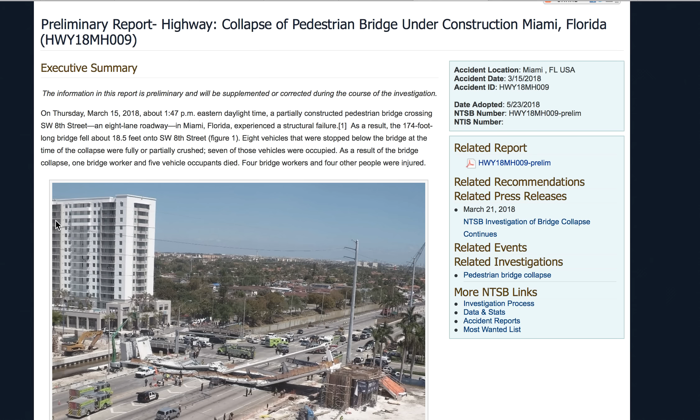The NTSB released a preliminary report on the pedestrian bridge collapse under construction in Miami, Florida. Here's the executive summary: the information in this report is preliminary and will be supplemented or corrected during the course of the investigation.

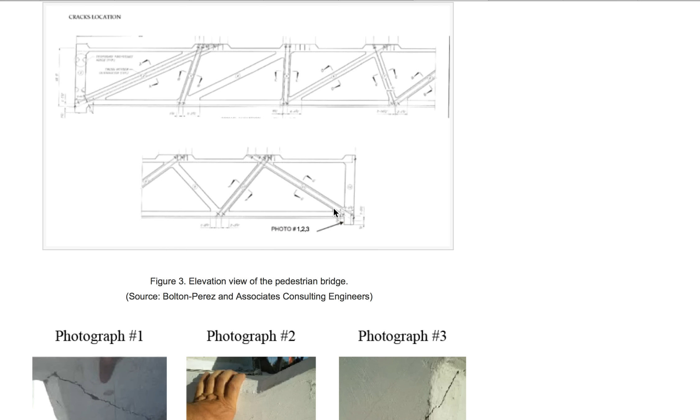Let's jump to where they bring up photos 1, 2, and 3, pointing here. Let's already discredit this silly report. How much effort does it take to point this arrow correctly? It would take the effort to know how to correlate the images to a sketch. So whoever put this report together, and whoever did the photos, obviously doesn't have the skill set to match this up.

So we're back to these airplane people making bridge diagrams that are just wrong. This shows again that the NTSB report is not going to be worth the paper it's printed on.

It's terrible. This crack - I have a few videos talking about crack analysis. I'd hate to say it, but it appears the NTSB is really leaning towards this crack as the failure point. To me, this shows the crack indicates movement, not necessarily the failure itself.

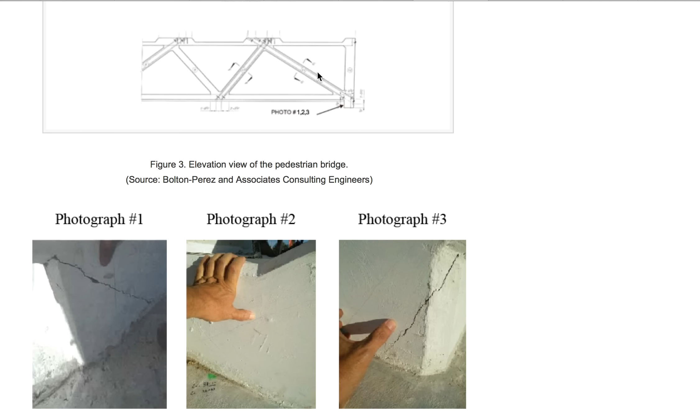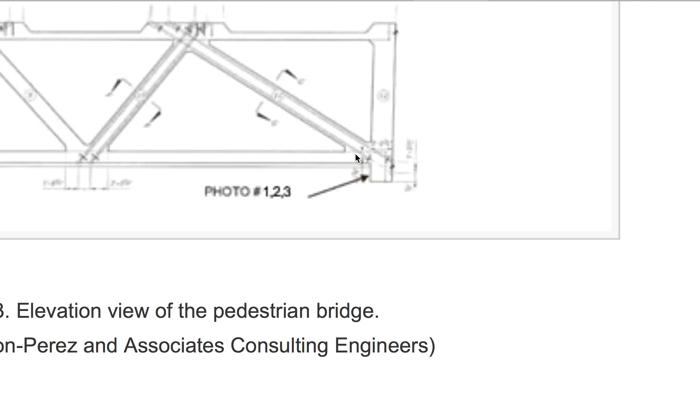If I put this under compression - number 11, the deck, the load path, even the bottom as I've pointed out - to say it cracked because of compression on the bottom half of this, not the top, implies that the load was able to find a weak point here as it compressed. But it can't compress that much. This gap is much larger than the expansive ability of that column in compression.

So looking at this crack, we do see that apparently at the bottom or the top there's some shearing going on. We can say something like - see the shadow mark - that one part passed the other.

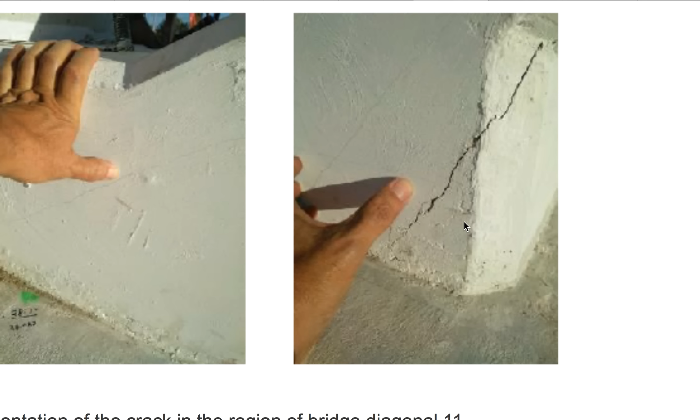Which I find interesting - I believe this was all cast at one time. That's assuming it wasn't, because we have this pour over this that we can't see. They're going to have to grind this surface off to determine that. It'd be nice to determine it.

We see this finishing going on here for you guys - some odd finishing - and over here in the left image also. So I'm doing this crack analysis, but I have to hurry up because I've got to hit the job site.

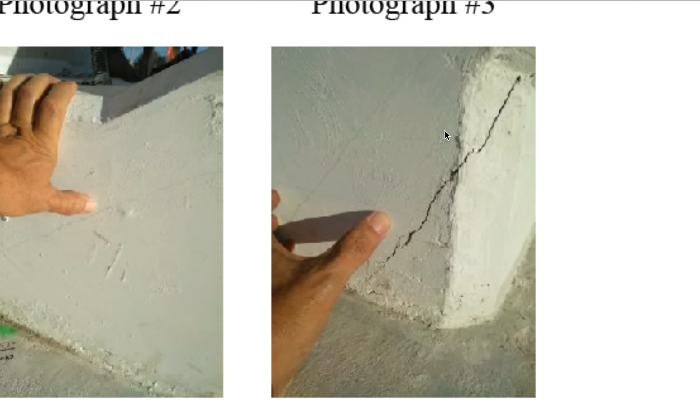So we've got these longitudinal cracks along the member, which could be indicators of the reinforcement inside under compression, buckling, as I showed in my other video on my other channel, mirroring itself through. It could be the dead weight causing it, the buckling of the reinforcement showing its way through.

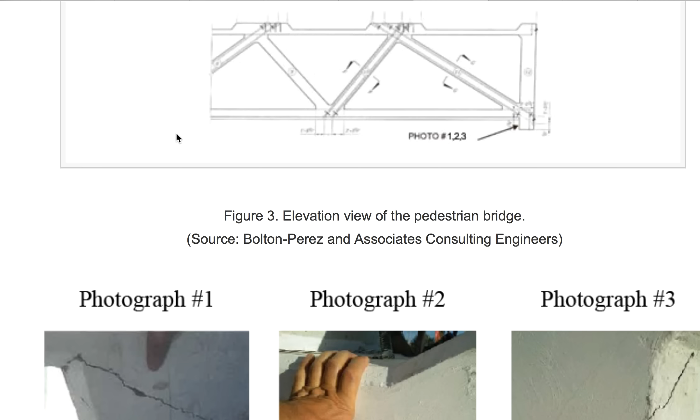Let's go to the other side. This would be, I believe, number 11 and the bottom of it, and that would be the underside, going in this direction. As you compress this, the compressive forces are in that direction.

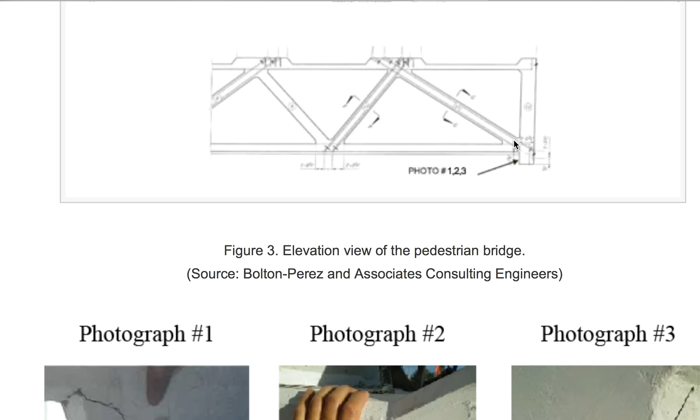If Denny Pate and them were trying to - not detension, but tension this column to address cracking, which I said in one of my other videos I believe they were addressing at the time of failure - then his audio where he says he's going to address them later, or implies he'll address them later with the FDOT, appears to be fabricated, not a full truth. It's not forthcoming, because I think they were addressing the cracks at that point, possibly including this crack.

Now, jumping onto the bridge inspection while they were moving it, we know now that these cracks appeared when they had it on the uprights on the side of the road. So then we have the engineer that was supposed to monitor the bridge during movement. If you can find his tweet or their page, they clearly say that it was uneventful. So that engineer is also being devious, because they're not saying that the existing cracks did not open up anymore, or maybe they did open up more when they put it in place.

Remember in my previous video that they were supposed to have supports in here during transportation. I think that the engineer of record and Denny Pate probably said, let's go ahead and post-tension these more during transportation to counteract that, since the supports aren't in there.

Now I also think that wasn't showing in the 2016 plans, which I can't find the full plans anymore in all my files. I don't think it was showing there. And so it was clearly intent in 2017.

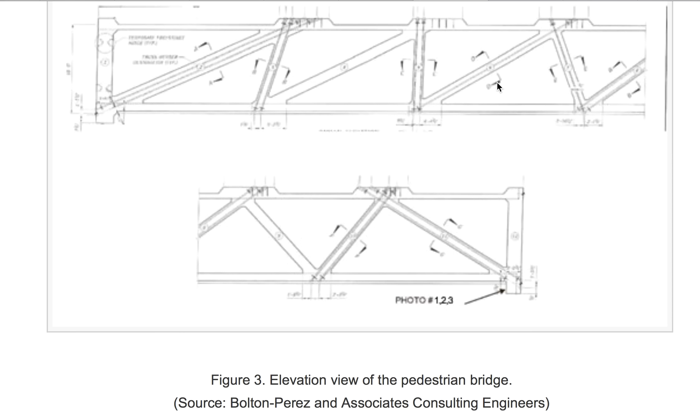So who released that? Who was holding back that information when we were clearly only allowed to find the FIU plans online of the 2016 with the stamp on it, and the rest of the plans not being fully stamped? This is, so you're not lying to the public, but you're deceiving them. You're purposely sending them down the wrong frenzied angle, because we all did analysis on the 2016 until the 2017 showed up.

And I think that was done with some nefarious reasons. So possibly—this is my opinion, when I say I think, this is all my opinion. I'm not slandering anybody. These are all my opinions.

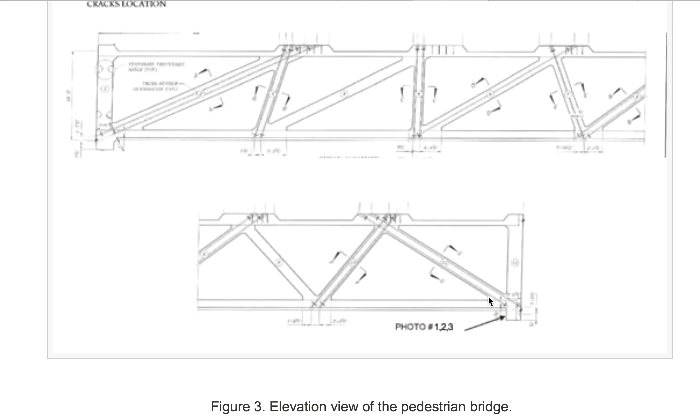I think the location of these members, as you know, is wrong. We have different locations of the post-tensioned members. One's high and one's low. Again, creasing this one first and working onto this one last—and I'm sorry for talking fast because I gotta go—once you did this, you created a load underneath the underside of this, a stress that could easily cause a buckling or cracking, even possibly cracking down the bottom of number 11 once you started it.

So I'm going to show you how we could get this crack. You created a force here, tension, post-tension in the top part. Here's roughly in line where the post-tensioning is. And then when you did that, they could have opened up the bottom, flexing this, creating a torque. Oddly, it would be the worst place you could imagine a torque would be. I would think it would be here. Deflection would have been more in the middle of this span of the post-tension rod.

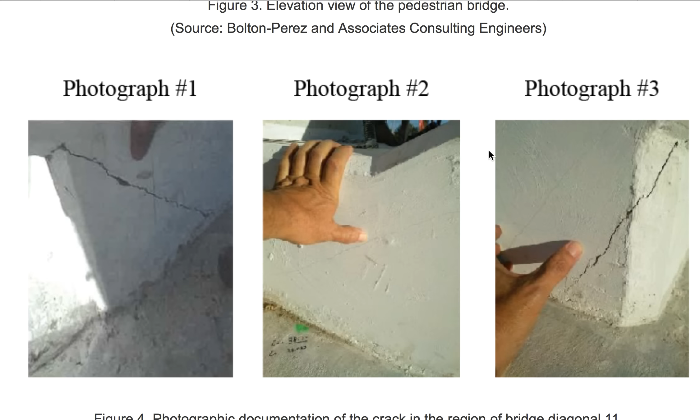I can't see it here. So maybe this is just a conflict of rebar inside here that once it was post-tensioned, or once it was cured, or it could be a very shallow piece of concrete across underneath the underside of this, half an inch from the surface. Something non-nefarious, if you will, as that. Something, nothing to cry about.

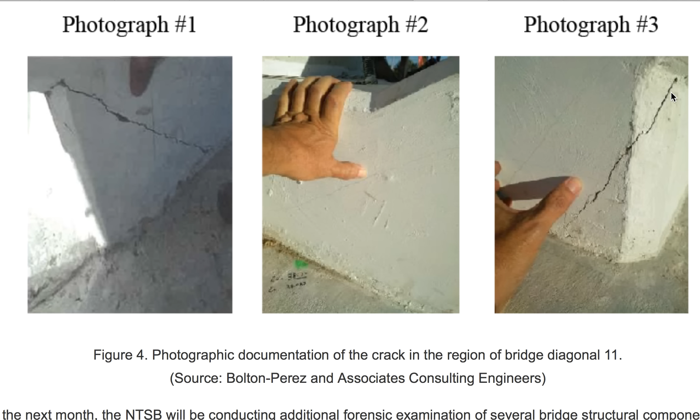Now, if you remove that, what happens when you remove it? And I'll get to the report, bear with me, sorry, my screen jumped. If you remove this section altogether—hand size is like 7 inches, I'm sorry, it's 8.5—it's right about there. It's right at the crack there, but it's in line with our post-tensioning.

Ideally, and now we got hindsight, but ideally, they should say, 'Oops, this might be something structural. I need a structural engineer, guys, to take a look at this. Until then, let's just close the bridge off.' So they would close the bridge off and address these cracks.

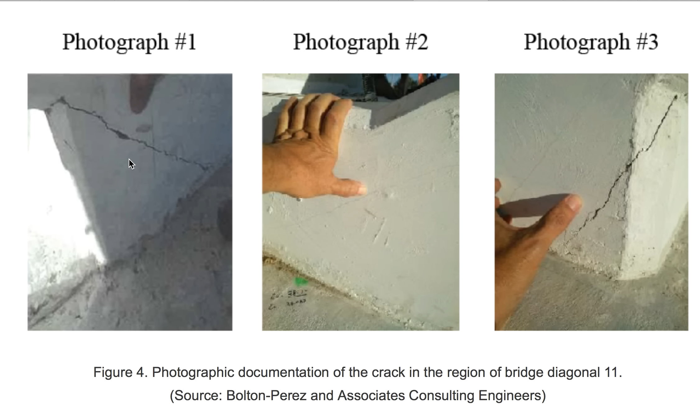But they knew about these cracks beforehand, as we saw in the letters where the BPA said, 'Let's address these cracks.' But in the same token, he says, 'I think it's just reinforcement that's causing the conflict.' I think that's what his general words were, and we should just monitor it. Well, that's unfair. You should actually resolve why it's there. Why do these cracks appear here? Do we have the middle deck flexing down?

If the middle decks were to flex down, the top and bottom flex, you could create a movement here, but you would also want to see the same down here. But nevertheless, they're different angles, so I just can't say that arbitrarily. Also note that there are different cracks inside here and here, here and here.

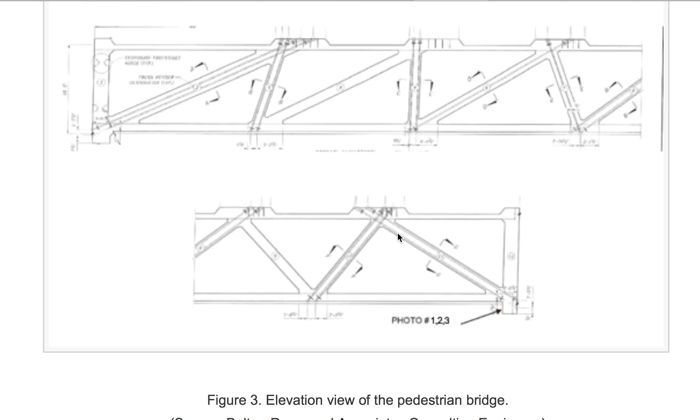This would be a crack. The cracks, I would think, appeared after they moved the structure and detensioned it, like the guy said at MCM, and maybe more cracks appeared at that point. Then maybe they had a meeting, right? All the engineers and non-engineers that were there said, let's go ahead and try something here. Let's try some post-tensioning, let's add back forces, in other words. I know we detensioned, now let's go back and add it again. Because we just don't have it in the plans that they should be detensioning or tensioning this in the steps.

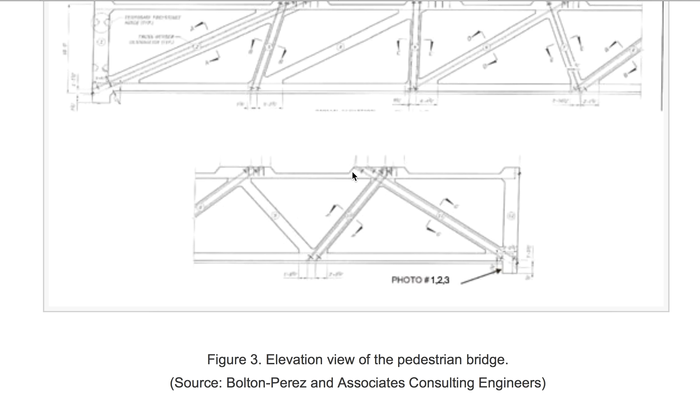Or maybe they had the cracks, they were trying to address it when it was still in the yard, on the side of the property, that all these cracks are present, specifically these cracks going across here. They would really close up, if you will, if you were to post-tension these rods.

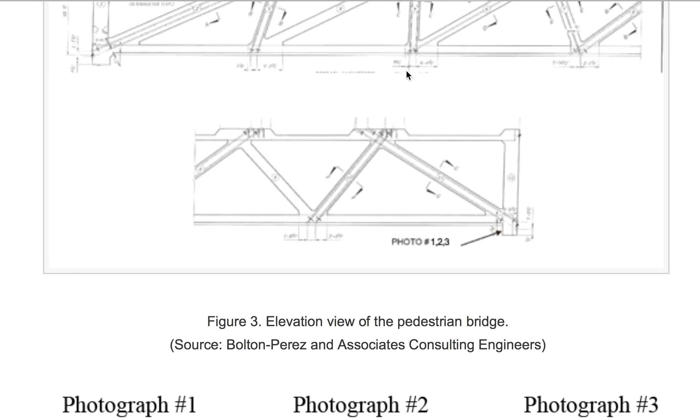If you look at the bridge images I showed in other videos, underside, you see this white coating they put on the underside of the canopy, which is in odd places. You can't accidentally get coating up there to that degree on the underside of the canopy, which is this distance from here to here, I forget what it is. Canopy's 8 foot wide, I forget this height, 16 feet.

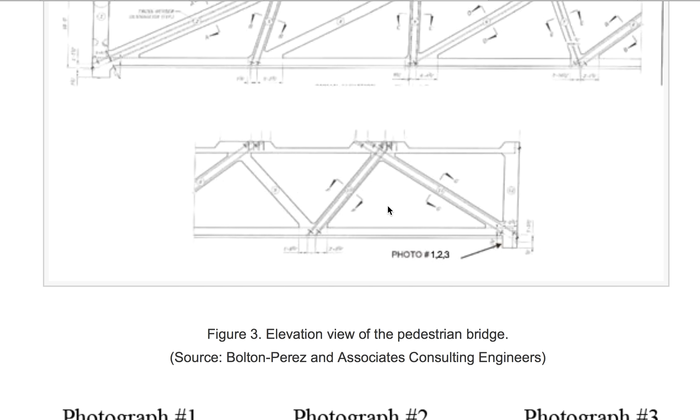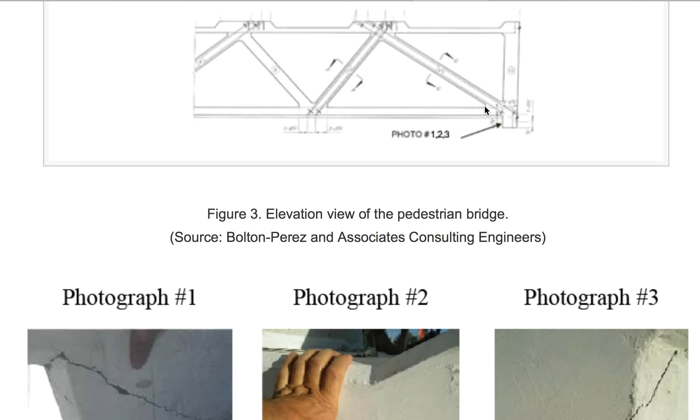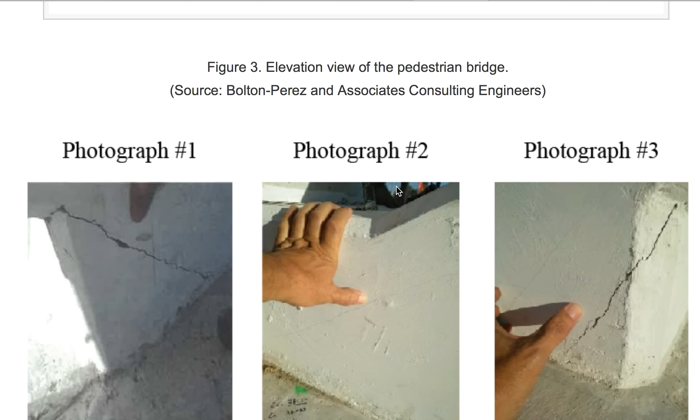Photo 1, 2, and 3. This is just ridiculous. That's sky, S-K-Y, right behind us. Those appear to be trees. That's sky, you can't get sky if you were looking at this. This configuration doesn't exist. This is chamfer. Maybe there's a chamfer on this, but this is coming down right in here and back up. And this is the column. This is the guy's hand. The other side of the bridge, as I put in another video, the other side of the column.

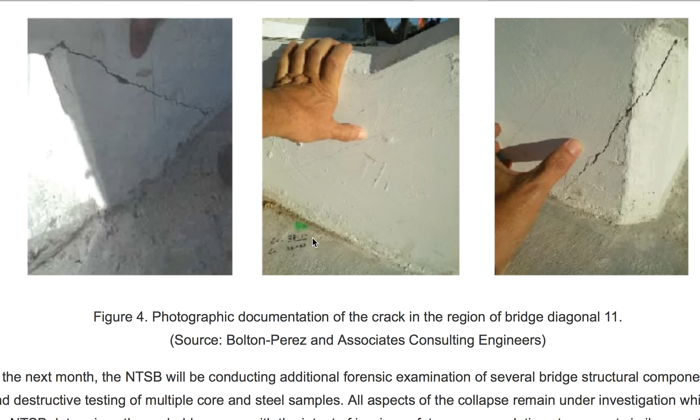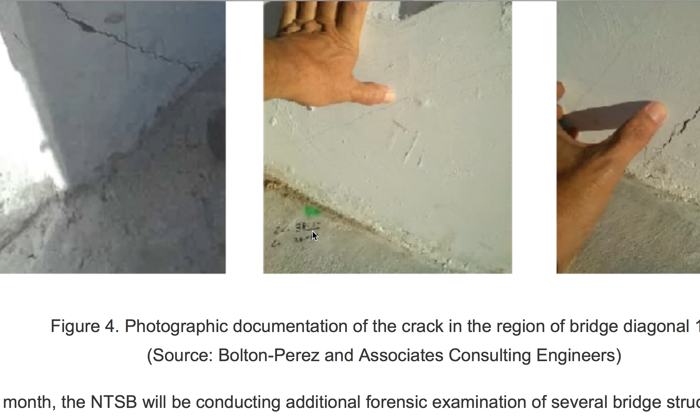So that's the NTSB joke clowns again. I didn't want to say that, but all right, it is a joke. Now in this image they also put online, they decided to redact this. It had some other details, and if you go to my other videos you can actually read this. Now all of a sudden the elevation, so this is not without redaction, sneakily redacted here. So what else did they redact in this image? Let's go in there.

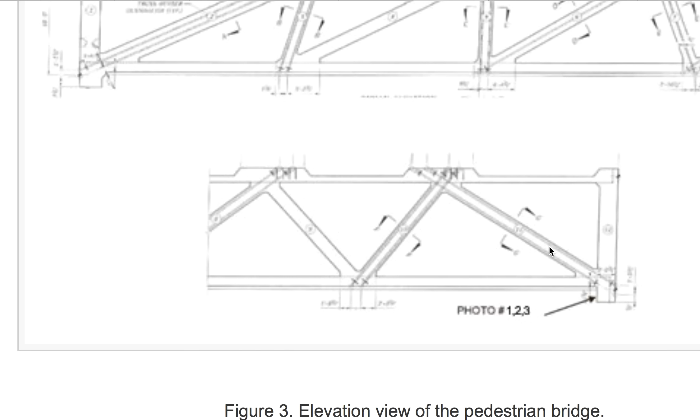So what I drove at here is that possibly, while it was still on the side, they post-tensioned this excessively. Then they moved the bridge, then they detensioned it, a crack showed up, and then maybe they said, let's go ahead and tension it back again.

They finished this section down here, which I showed before - these are equally spaced, so there's no cracking down here because it's not close to the surface. Different angle also, and this is close to the surface, which creates even more force down here. It puts a bottom force down here that could open up even more cracking.

Perhaps during that time they said, let's close this up. As I said in previous videos, a 2-hour discussion on cracks means these are serious cracks, which means they should have supported this structure, temporarily closed off the bridge, or closed off this road, because it's negligence when you're dealing with this.

They did the same thing with this bridge down in South Carolina, I think it is, Charleston - I might have got that location wrong. That was a FIGG bridge, as I understand it, MCM.

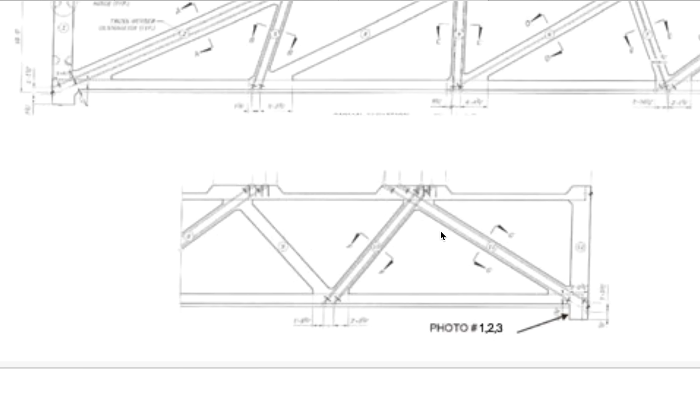If you remember, one of my nice followers, donation guy, thank you, commented that you mentioned an app that would warn you if you're going across a FIGG bridge, an MCM build, be wary, would you like to go around? I forgot I said that. So that app still needs to be made - that's some money for some app developer. Make it, man, I'm going to buy it. You see all these people that are going to buy it. You could expand on that and make all the bridges app related.

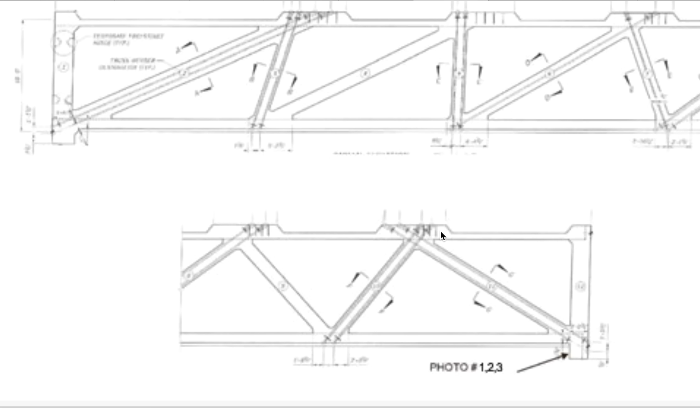So now let's talk about that bridge, and I'll jump back to this - that bridge, because I had to dive into that for people. I guess I shouldn't, I will not talk about that bridge on this because it would be a conflict of statements, I think. I don't want to bring two things up.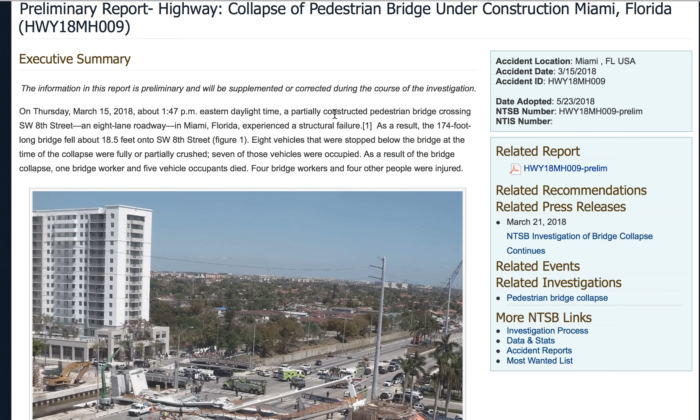Okay, on Thursday, March 15, 2018, about 1:47 p.m. Eastern Daylight Time - that's very important, this timeline - a partially constructed pedestrian bridge. Now it's partially constructed, this means it wasn't self-supported.

This pedestrian bridge is one section of the other section going across here, so they're making it clear this is partial. Now FIU, say if FIU was in that meeting, FIU has a little skin in the game. This crack shows up - FIU has to report to the federal government about this loan and issues and problems. The last thing they want to report, in my opinion, is that we found these cracks in this design which we approved, as a quote structural engineering school end quote, that we must have missed it in the design, but this thing is cracking where we don't predict it to crack, and they're unknowns.

So we closed off the road. We had FDOT close off the road, so we closed off a highway - I don't know if it's federally funded. Let's go down that line, make it more dramatic: we closed off a federally funded highway indefinitely until we figure out what to do with these cracks. We fear that if we try to put the SPMTs under, lift the bridge back up and put it back on the temporary structure on the side of the road, which we just moved approximately 5 days prior, we feel that would be the best place for this bridge, best served, and we will re-support it over there and work out this crack issue with gamma testing, with all types of engineering, or possibly dismantling sections of the bridge, temporarily supporting sections of the bridge.

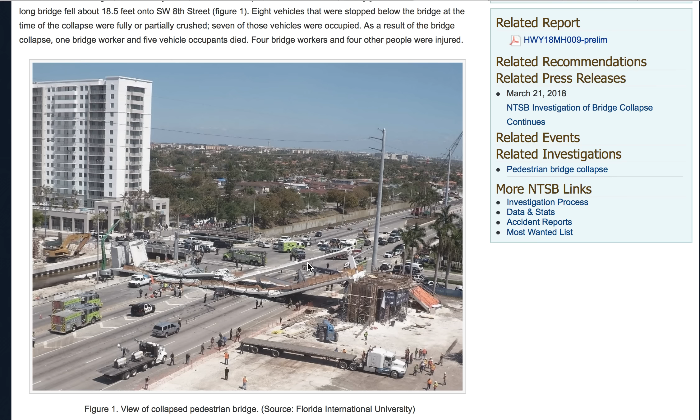I know my statement is kind of a big statement, a big attack, and yes, this is a big attack. This might be my coup d'etat. Well, I can't even fix that now because it's in the video, so you guys control my screwing up of that. All right, how I just said that. But what's so cool is you guys will write it, and you won't be able to verbally correct me. So I actually know how to say it now in my brain.

I screw up. I also screw up with the word ambulance. I also screw up sometimes with alligator if I don't calm down and say it.

This is my final stab at this bridge at this point, because the data's come to an end. NTSB released their thing, and now this is my counter. And this is what I now am saying: total negligence, calling it for how I see it.

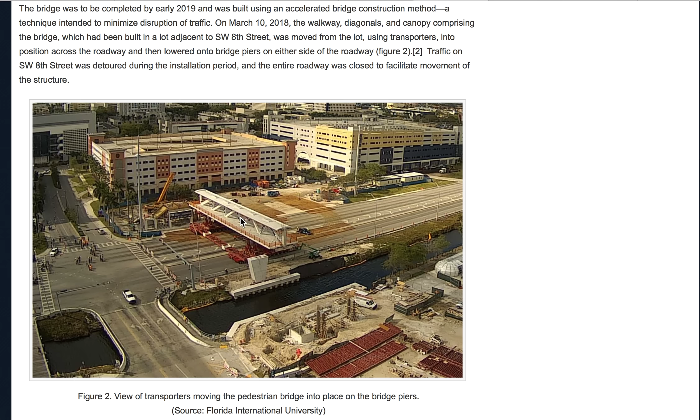So now we have all of this to cover up. Did they, since they knew that they were transporting this bridge without the supports in it, also know how much about this jackhammering of the node? How much do they know about it? Are they going to release it? We did not know about the jackhammering of the node until I put that video out. Well, I don't know when you guys found out, but the jackhammer was very present.

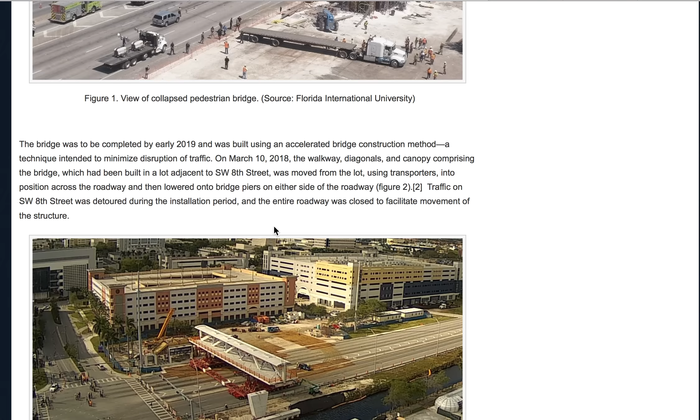Does the NTSB, and let's look at who's also investigating this. So as we look at who's investigating, we've got the Federal Highway Administration. What's the question about the jackhammer? Because they're just talking about number 11, but they're not talking about accessing it. And I fear that they're going to just blame number 11. This is what they're feeling out in the public right now, to see if we're just going to accept that this crack is a total failure of the entire structure.

We've got other things going on there. We've got other companies that are negligent, I think, which is VSL, the post-tensioning company. We've got MCM, the builder. We've got BPA that did the inspections that they're being soft on. We've got FIU not making the proper reports and acting like the real authority and having a conflict of interest. They don't want to shut down a bridge that they brag so much about in the public, and it's pretty much their sweetheart new design the whole world's going to take on, and they're going to be the ones making engineers now.

And then we have FDOT, who also is holding back by allowing all this craziness to continue, especially since they represent the pass-through money and the reporting company also to the FHWA, the Federal Highway Administration. So then we've got Turner Fairbank Highway Research Center - they're helping. Those are the ones that are going to help with the post-tensioning rods.

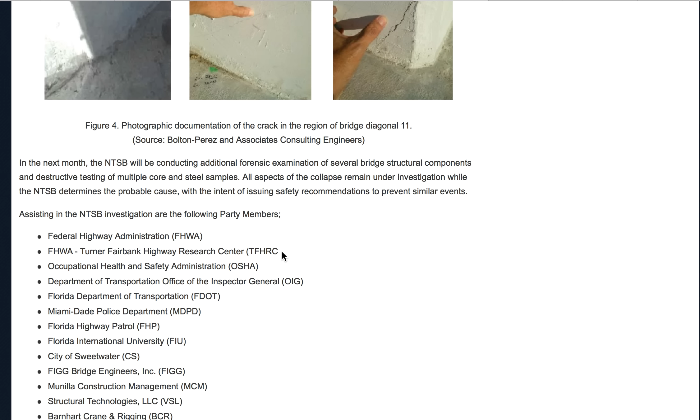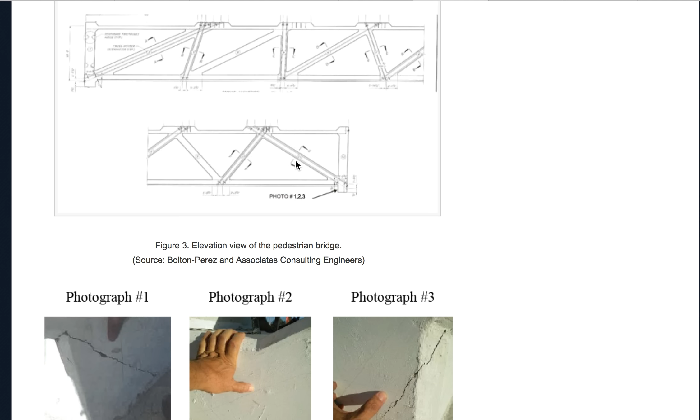I believe they're going to see how much the rod was elongated. Remember, if they elongated this rod by putting extra post-tensioning on it, and then they detensioned it, you elongated the rod - as long as it's in an elastic mode, it can go back. But it had to be determined if it was still elastic or not. So if they elongate, then release it, and then go back and elongate again, that rod just went over the same section twice, and that's what I find interesting.

These post-tension rods, yes, they have the ability to come back to where they were, but does this rod - test this rod specifically, not this rod specifically, but this same design, the same lot - they should have a lot number, an LOT, for this.

Sometimes I have fun with people because I learned from a scientist who was great. He taught me how to do a few things: one was to curse for effect, and one was to actually misspell for effect. He taught me that people are going to remember some mistakes, and you use this—now you know why I use some of my mistakes. Use this for directing people to what you want them to remember. And it works. Sometimes you stumble on purpose at a certain location, so people will remember that one stumble.

He told me that cursing can do the same thing, if you curse about one specific item—not if you curse all the time. It's got to be one thing, and then you can address it again. Then you need some shock effect, and sometimes the shock effect is LOTT, the lot. So you're going to remember that this has a lot, and this lot is just a sample.

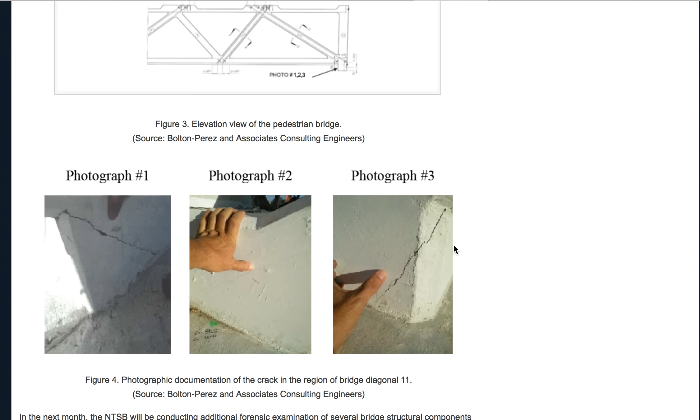A sample should maintain per the rules for how you do post-tensioning. You need to keep a sample of your product, test it, and of the cabling and of the post-tension bar. So this company can then use a sample with a known jack, and they can test it and see the elongation. Can you elongate to the point that they did it? And then can you detension it? And then can you elongate it again? What's the effect of that? Once you elongate it, you say yes, you can do it.

Then take it to failure and see what's the next step of failure after you've done it through, say, those three processes. Or maybe they made four. Maybe they elongated and put it back, and elongated and put it back. Maybe they did it six times.

That won't be in reports because you don't report that. Frankly, as a contractor, you're not going to report all your screw-ups. You're going to say it looks good, and you're going to try to justify your screw-ups, which we see MCM did. You really are, because we have our amygdala—we're going to fight back and say why our screw-ups are really sound thinking.

For example, me saying why I screwed up with my knife to the bull—I did it on purpose, a knife to the bull. You guys can use whatever you want with that. I'm doing it on purpose. Remember my tricks I use.

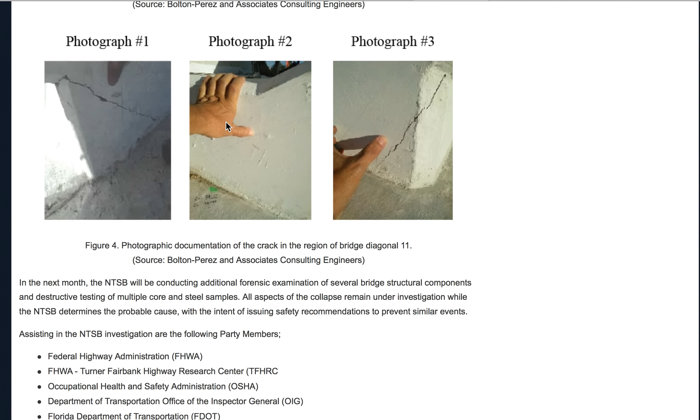Occupational Health and Safety Administration—so we got OSHA there. Interesting, OSHA's there. If OSHA's there, they jump ahead of the line a little bit, and they can now start fining people and everything else. They don't have to play ball. They're a different agency than OIG, than FDOT—they don't answer to the state and all these agencies. They can actually have a report that will—I'd like to see the preliminary report of OSHA.

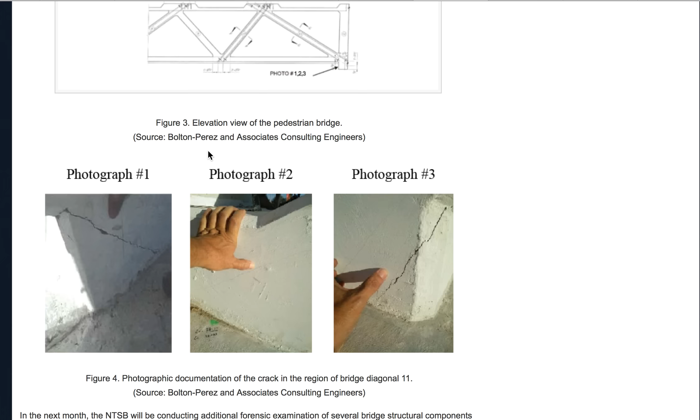I wonder what they say already. I've had a couple of friends die, and OSHA's pretty fast with their reports. So I'd like to see what their report says.

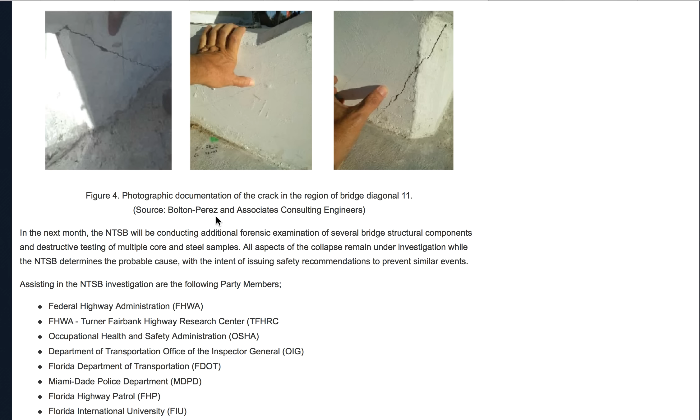But remember, you can't use an OSHA report in a court of law, as I understand it. So OSHA can get it wrong—it doesn't matter, you can't. There's nothing really to do there. And what are they going to say? OSHA's going to talk about the dead people because someone died. I don't know if they have to sign an agreement with...

NTSB, to play ball with them, because it appears assisting the NTSB investigation of the following parties. NTSB, as we know with the Elon Musk thing, makes you sign a non-disclosure. And interesting—if you want to protect yourself from the public, that non-disclosure can work in your favor. For example, as you follow my mouse, you'd want, in your interest, to not have to talk to the public, so you'd want to sign that non-disclosure so you can say, look, I can't tell you—the federal government says I signed a non-disclosure with them, or whatever the agreement is about.

Well, as you can see, Elon Musk, and I'm still dealing with this bridge, he signed it, but then he said, wait a minute, this is not in the best interest of the company, the path they took, as I understand it. So he made outward comments, and NTSB, as I understand, at one point said, and I say at one point because they can retract, they said we got rid of them. Whereas Elon Musk, as I understand it, they're saying they walked. I don't know, it's still the same end result. Elon Musk is no longer party to the NTSB's do-not-communicate clause, so they sure enough can give a lot more than that one piece of data. They're now free because they're no longer a participating party.

Let's talk about that. NTSB, as I understand it, you also cannot use their findings in a criminal investigation. You have to go about it a different way, as I understand it, to come up with the same answer if you're going to go to court. That's how I understand it.

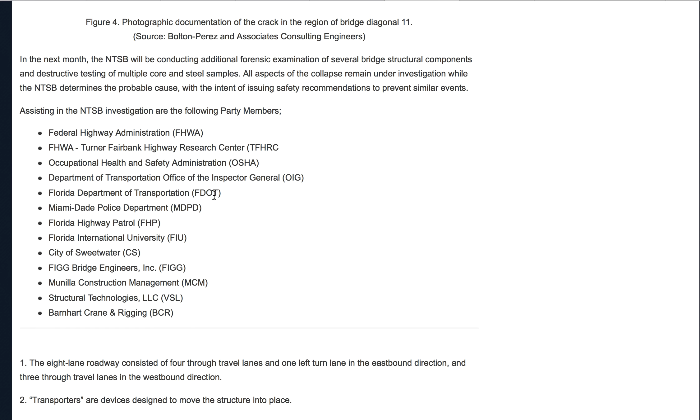And then we got Barnhart Crane and Rigging. They're the people that move - I think the Barnhart Crane - they move the transporter. They're the transportation company, as I understand it, but this is only shall and should. This is just junk on FDOT, as I said in another video, that they shall be involved, they should be involved in the building and design of the bridge. So they could say, hey look, we're going to put load points here, and this is going to create stresses down here on the cantilever. Well, how are you going to resolve it? Let's resolve it by adding more steel going across on the underside, giving some supports and bridging. They should have been involved more, I think. It just seems haphazard - like they showed up the day of, almost, and said 'let's try this,' and 'let's take this out because that costs money.'

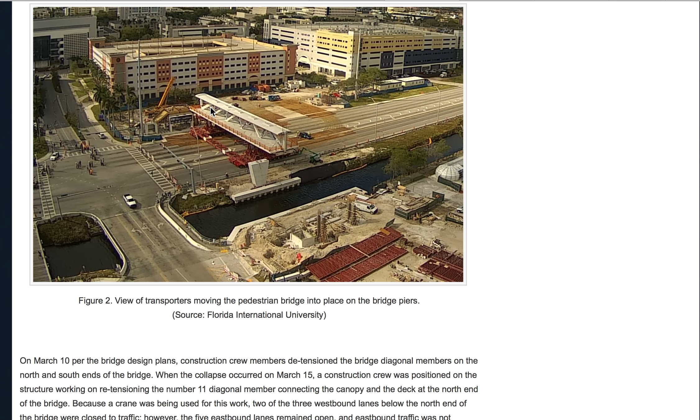I was wrapping this video up, I said, right? But it looks like it's getting a little longer.

Here's my thinking, and it's odd that this is the way it really might have gone. This was over here in place, here and here. And they were building this bridge, and as they built the structure, they said, hey, that looks kind of odd. Let's go ahead and strip those forms down. I know we're supposed to keep them in place until we move it over here. But I have a little doubt, and we all should have doubt. That's okay.

Let's say it's Denny Pate, the head engineer, and I apologize, Denny Pate, if it wasn't your thought. This is my thought, you know, this is a hypothetical. So let's go ahead, you know what, let's strip. Or MCM could have said it, right?

Or they saw cracks through the forms. Don't ask me how you see cracks through forms, right? They're solid. So curiosity killed the cat. Let's strip the forms down. And to strip the forms down, they got to remove all the temporary supports and all. So once they're out, they're not going to put them back. So let's strip the forms down, because I want to see what it looks like before we move it over here, because this is a new design.

Or maybe FIU said, let's strip those forms and let's see. Or FDOT said, you know what, I know you want to move it over there with the forms in place, but what if we do that and it collapses over here? It's going to be such an embarrassing thing. Let's go ahead and do this in the midnight hour. Let's go ahead and strip this down, and let me see what it looks like at these. Let's see what these look like.

And we know that they were stripped down because we see that, I think it's Morales, the BPA guy, says after the form was stripped, cracking was observed. And then you know the reports from there that we have public knowledge of. You see that in my other videos. So they said, hey, everything's copacetic. Somehow they're copacetic. Or maybe they added the post-tensioning to resolve the cracks that we know to be here.

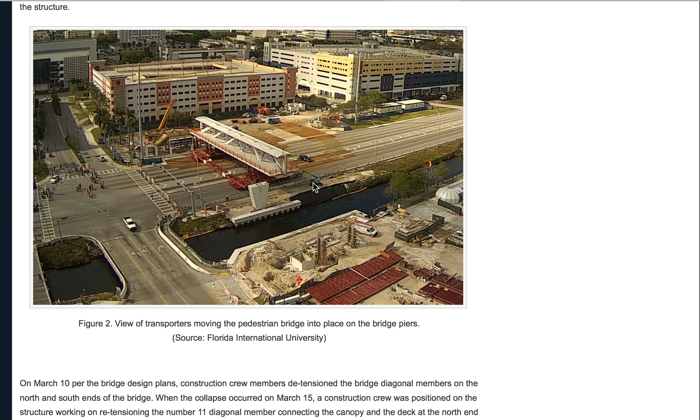But we have the stupid, in my opinion, BPA coming forward, throwing themselves under the bus by saying, I think we should be monitoring it. What? BPA should never be allowed to monitor a bridge move ever again, for any reason. FDOT, everybody who's tied into FDOT who saw those notes, and FIU, just, oh my gosh, nothing's going to happen to them. There's negligence, but nothing's going to happen. So why do we bother?

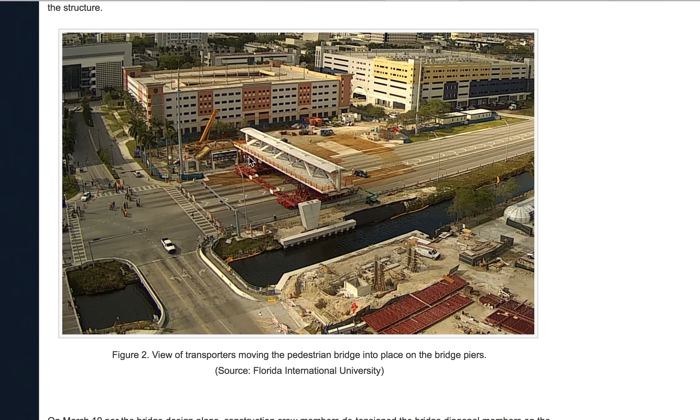So people have asked me, what do you think is going to happen? I think they're all going to get paid. They're going to pay the victims off, and that's going to be it. The victims are going to get paid off. This is going to get thrown in the trash. The report's going to come out, and no heads will roll. Nobody's going to jail. Nobody's going to jail.

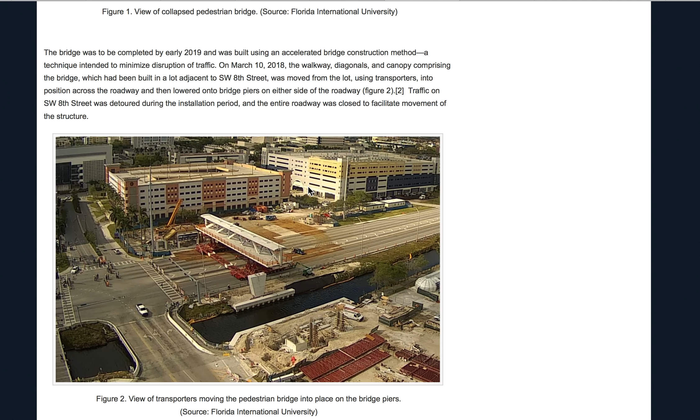That's the amazing thing, because it was already mentioned that. Could the Federal Highway Department bring somebody to jail? Could the FBI, the DOJ, prosecute? You can reach on that if you want.

But as people alluded to, these Democrats aren't going to prosecute Democrats. You're not going to prosecute FIU. That could have the effect of ruining a university. We're not going to do that, are we? You know, even I'm not - it's just not worth it. The energy, please, I don't want to go down on energy.

I'm more structural here. As a result, the 174-foot bridge fell 18.5 feet. As we know, I think the top of the bridge is 30 plus feet to the bottom here. 18 feet would probably be the bottom of this deck to here. So we have 18.5 feet of the bottom deck falling that far. The top deck fell, well, the 30 plus feet.

It made it to the ground, but then you'd minus off—it actually fell to the top surface of here, so you'd have to measure the height from here to the ground. So it fell maybe 28 feet, 25 feet. And this didn't fall to the ground at all.

You can play with words all you want. To me, this is playing with percentages. I think this is ridiculous to say that. See, it says see figure 1, so they're referencing the 18 feet fall. They could have referenced that it did not fall to the ground at all by referencing this point.

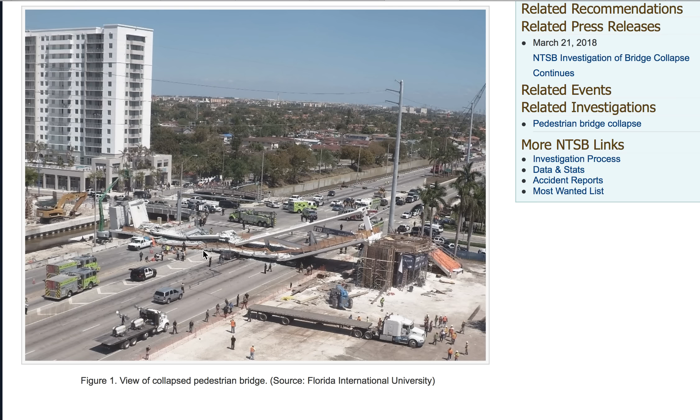Where are they getting the 18 feet from? Structurally, I'm just being nitpicky now, but I also see it as nefarious wording. I don't like it because it's

Ambiguous wording also. Okay, 8 vehicles that were stopped below the bridge at the time of the collapse were fully or partially crushed—that were stopped below. They could have been more... 8 vehicles that were in public. They could have been more damning: 8 people of the public, not just 8 vehicles.

Vehicles are now... this is the gun thing, you know, guns kill people. Well, here are 8 vehicles. 8 vehicles that were stopped below the bridge at the time of the collapse were fully or partially crushed.

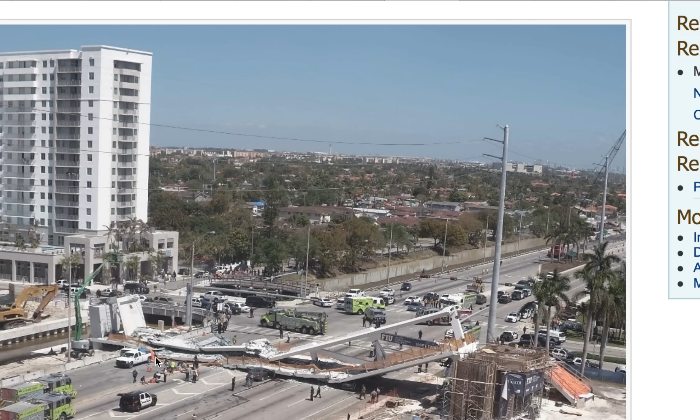7 of those vehicles were occupied, so it appears that this would be the one that was not occupied, the VSL vehicle, because the VSL worker, I believe—if you look in this image—died of head injury down here. That's my rough summation or thinking at this point. Remember, I can correct everything later down below as we get more data.

8 vehicles, but as a result of the bridge collapse, 1 bridge worker and 5 vehicle occupants died. 1 bridge worker and 5 vehicle occupants died. This is just odd wording to me.

Maybe I'm letting my amygdala get a little frenzied, but I'd like to say, you know, 5 members of the public either had nothing to do with this. I'd like to see a little more emotional attachment in this NTSB report. But you guys are going to troll me saying, well, it's NTSB, they don't have to be emotional. They're dealing with that—fair enough.

Okay, fair enough, so you can discount my emotion in my reading of this. But they should involve emotions when they document this. 4 bridge workers and 4 other people were injured. So 4 bridge workers—now, are they MCM, are they VSL? So we have a total of 5. So we got 1 dead and 4 bridge workers. We got plenty of workers out here, so they're not referring to them, obviously.

So that means we had 4 people in here. I thought 5—I thought there were 3 at one point in my videos. So we have 4 workers. So I don't know, do we count the engineers as workers now?

Somebody trolled me on that, saying, well, engineers—you know what, I don't think there was an engineer present during that post-tensioning. I think if there was, they might have reported back that, hey, stop work on this. You'd be worried about your license, your livelihood, and going to jail, I would think.

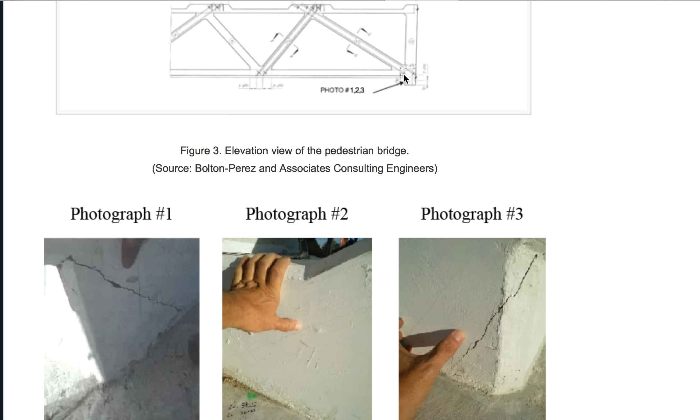This crack—because NTSB is alluding this is the crack—is in line with the crack. So how is... compressing this area, this lower part of the deck, it's in the lower deck, all right, these two are. How is it compressing this to this going to close this crack up?

This crack is now so major—so I'm giving and I'm taking away. I'm saying it's really probably not as major as it looks. It's very major because it's showing movement, which needs to be addressed. That's what's very major. This crack is clearly in line with apparently rebar or the post-tensioning in here. I wouldn't know because I don't know how to do measurements here based off of the plans and the location of it, the as-builts and the shop drawings.

They could definitely determine what these cracks would be indicators of. If you were trying to close this crack up, let's say that was your intent. I still say you were trying to close the cracks up in here, and the reports they must be getting - remember I said earlier in this video, only my opinion - that they're like, hey, we can't really tell them the truth, let's just run with this is what we're working on, and clearly anybody will be able to defend this in court of law because we can say that would have done nothing.

My opinion, I think post-tension, adding tension to this would have done nothing to close this up. I don't see the load path of this crunching, if you will, closing, doing anything to close up this insignificant part. But I do know that this bottom section weighs more than the top section. I do know that there's more concrete in here than the concrete in here structurally, meaning there's resistance ability before failure here, than down to here, than down here.

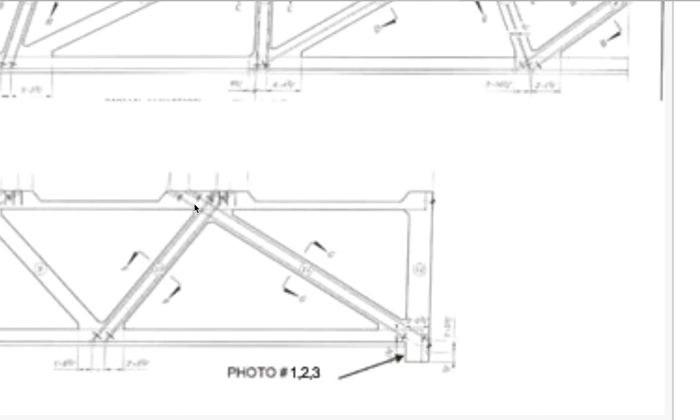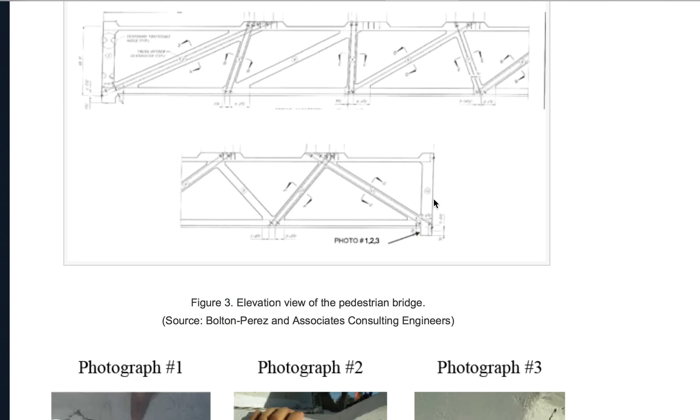Now, they said that they reserve the right to change. I hope they watch my videos, and I hope enough people speak up to go, I'm not buying it. I'm not buying this. I'm not buying it right now. It's for sale, but no thank you. My engineering abilities did not fall for that stupidness.

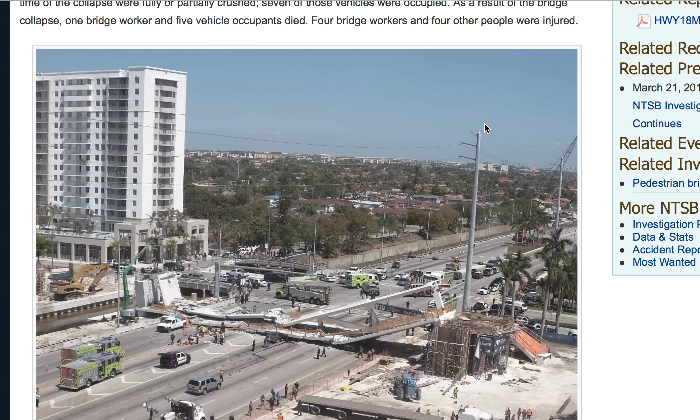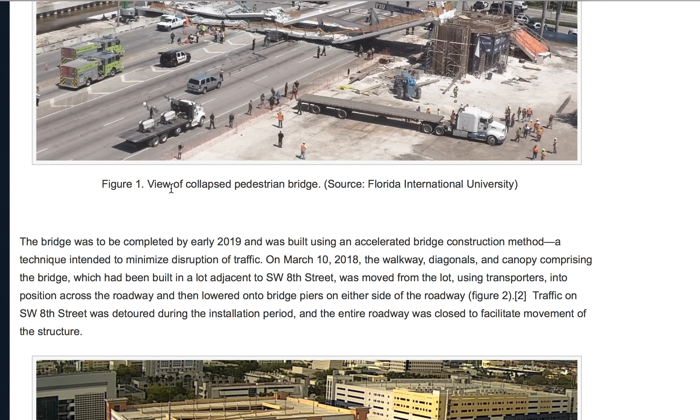As a result, 4 workers and 4 other people were injured. Other people - who are the other people? They're declaring 4 other people. The pedestrians - they're not saying they're pedestrians, they're not clarifying other people. So they're hiding these other people. Are they engineers? Who are they? And that's not a conspiracy thing, that's saying that they're making a declaration, but they're being nefarious, I think, with their wording. And I mean the word nefarious. View of collapsed pedestrian, but in my opinion...

Okay, there we go. The bridge was to be completed by early 2019, and now everybody knows this is late 2018.

Remember they had an addendum, here's the addendum from 2019. We would love to see the addendum extension, which would show why they asked for the extension and say it was built using the changes - maybe because they widened it by 12 feet, and then needed the 2019 extension, built using accelerated bridge construction method.

On March 10, 2018, the walkway diagonals and canopy comprising the bridge - you can read that yourselves. Clearly we're getting back to this accidental wording that can mean so many different things, with the canopy comprising the bridge having been built in a lot adjacent right here, adjacent to Southwest 8th Street.

It was moved from the lot using transporters - you heard me say transporters many times - into position across the roadway, and then lowered onto bridge piers on either side of the roadway. Figure 2.

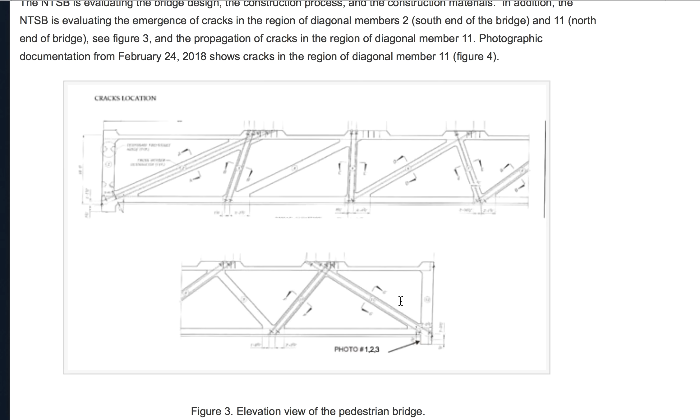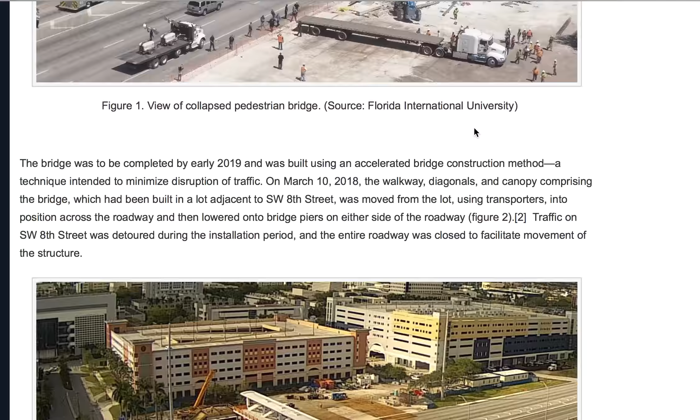Figures 2 and 2, let's look for 2 and 2 for a second here. 2 parentheses - so we don't have another 2, do we? No. Okay, 2, 2, and then we got a bracket and 2. So where's this 2? Okay, figure 2, and then 2 - so where's the bracket? Is it up top? Did I miss it? Am I missing some small detail? Okay, here's 1, alright, 1 as a result.

So here's the findings, okay, so 1, that's a major thing. Then we slip to the next point, and number 2 - remember I'm doing this live for you guys - traffic on Southwest 8th Street was detoured during the installation period, and the entire roadway was closed to facilitate movement of the structure. Okay, that's just stupid data, but we know that.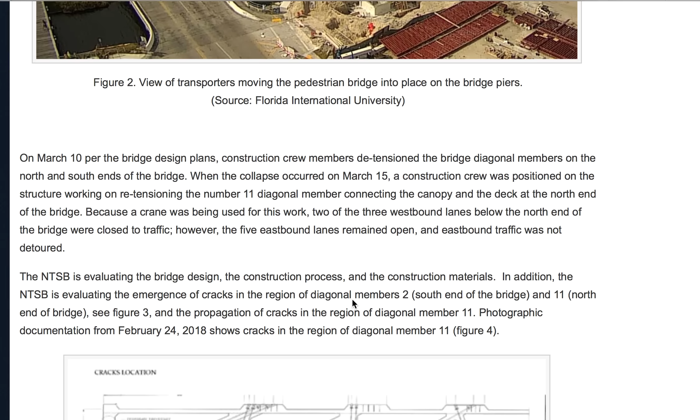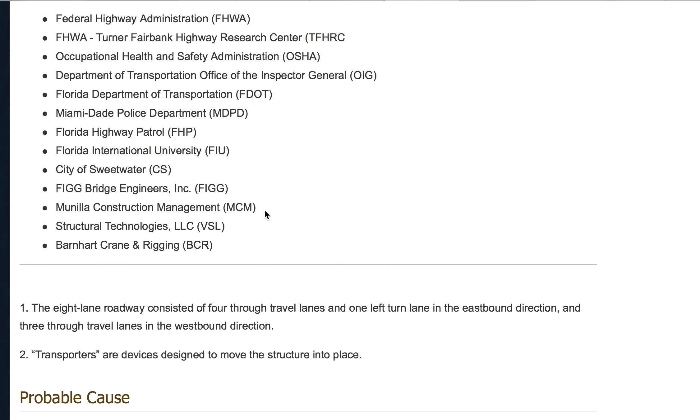Alright, where's number 3 bracket? Now that I see how these brackets run, let me get to number 3 - let me see if there is a number 3, and I'll get back to reading right there. Let me see the 3 bracket - this is how I determine some stuff, I want to see if there's anything. Okay, so we can show there are no more brackets as I scroll back up. Sorry for the scroll, I'm going to wrap it up after I get to the bottom, but I have to get to the immunity thing. I see my notes, I don't see a 3, so I'm going to say there's no 3, and I might have to retract that as I read down. But there is no 3, so they made two statements here. Moving on - the entire roadway was closed throughout, we know that.

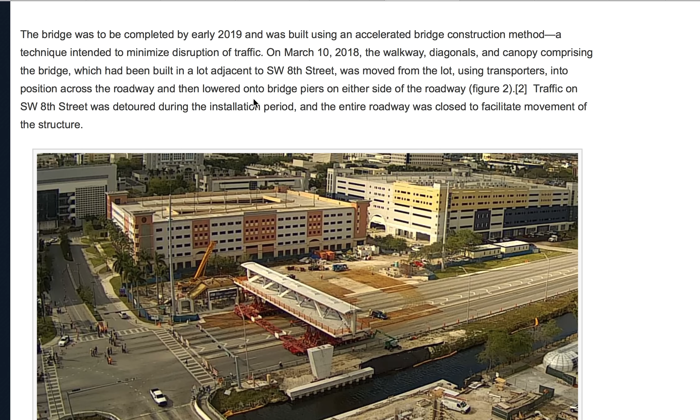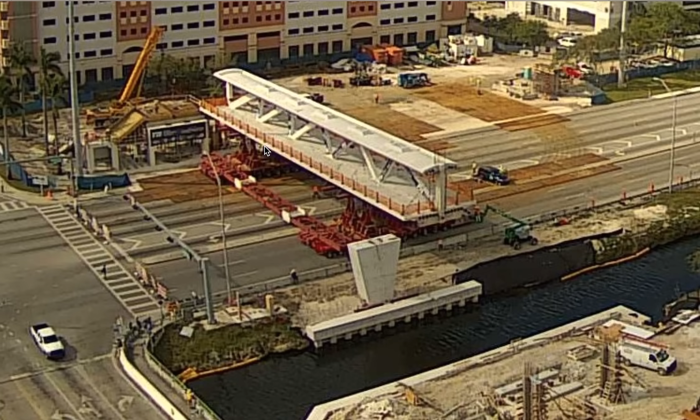So figure 2, bridge into place - we saw this in videos, they used an image so far away. You know me, I'm going to call it like I see it - so NTSB used an image so far away that does not show any damage of the nodes. I think by now, because I've tagged them a few times and other people sent them my emails, they took my videos - I'm clearly all over this jackhammering thing and all these nodes. So they used an image that no one can scroll in and grab data off. But then they dropped the ball with their image down below, as already mentioned, pointing in the wrong direction - I think they're trying to be...

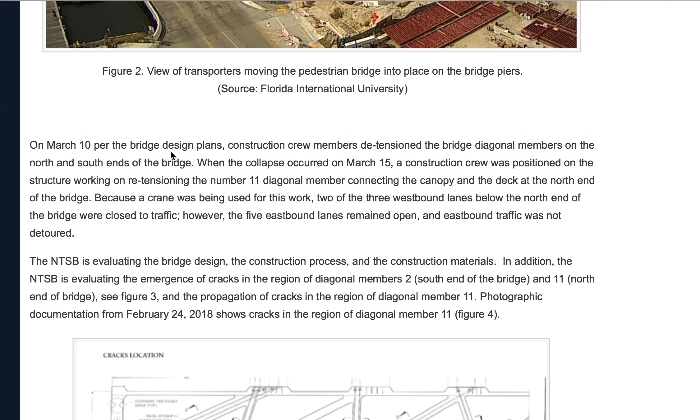I'll move on. On March 10th, per the bridge design plans, construction crew members detensioned the bridge diagonal members on the north-south ends of the bridge, on March 10th. This is wrong, because per the design plans, there were supposed to be supports in here. And there were - this is 100%, I got to write my title now: NTSB false. NTSB, and you guys are getting it before I write it - NTSB, something like, I'm going to have to title it 'release false information,' something of that nature. Okay guys, I'm just letting you share my thoughts on it.

And that's because this is a false statement, and I gotta remember, bridge plans - this is false. I don't have time to tag it, you guys have to look at my other video because I don't know - I'll put it down below. So let me write it down and put it down below.

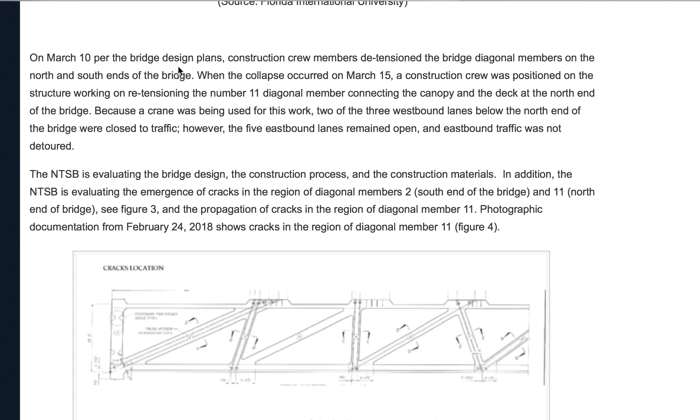You guys are going to have to look below in the comments and find an image I'll attach showing this is not right, because the plans clearly state that detensioning was not supposed to take place until the main span structure was complete. The main span is this larger span. It cannot be complete until the longitudinal post-tension cables are all installed and all the grouting is done. And I'd say the loads that continue, the 16-inch pipe loads, need to be part of this structure before you can detension it, because it's still not complete until you attach to it.

Why? Because they're not just decorative, they're going to help with the vibration. I'm trying to think of that bridge that vibrates... it begins with T. So we have vibration that has to be addressed, and that was being done by the 16-inch pipes.

NTSB, I'm showing right here, this is just BS. This is a lie. NTSB, again, these are the airplane people that can't follow structural details. This is proof of it. We're so many months into it, and the engineers they hired obviously think they're talking to the stupid general public, that somebody like myself isn't going to dig in.

And it's going to work. Obviously it's going to work because they're putting it out here, sampling this to see if it's going to work. And this shows that NTSB is not looking out for the public on this one. They're protecting the interests of everybody involved, not us, the public, because this is a false statement.

On March 10th, per the bridge design plans. Show it to me. Show me on the NTSB report, show me on the design plans, and I'll delete every last video I have. For clarity, these are the plans FDOT released, not any plans you might have that aren't released. So I'll make a retraction, even though my factual statements stand, I'll just delete them all. Every last video I have, I will delete.

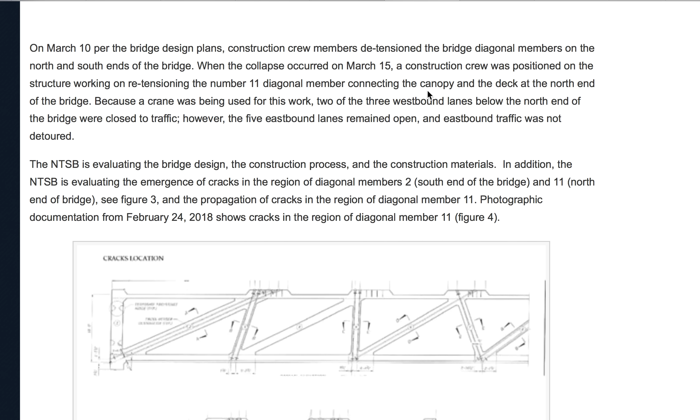So the number 11, not connecting the canopy and the deck. They're making it clear that this number 11 connects the canopy and the deck, right here. It doesn't do anything else. It connects the number 11 in there. That's what it does. Okay, so let's just talk about that as we move on.

North end of the bridge, a construction crew was positioned on the structure working on retensioning. It's not detensioning, retensioning. Retensioning means it was detensioned, which is clear up here, and then it's now retensioning. So this is where I show you where we got 3 points of tensioning. We got first tensioning, then detensioning, now retensioning. This is what's being given. Maybe it was done even more times, as I told you in the previous comments. And if I didn't, that's what I'm saying. The number 11 diagonal member connecting the canopy there.

Well, where are you coming with this, because now you're starting a sentence with 'because'? Because a crane was being used for this work, 2 of the 3 westbound lanes below the north end of the bridge were closed to traffic. However, the 5 eastbound lanes remaining open, eastbound traffic was not detoured.

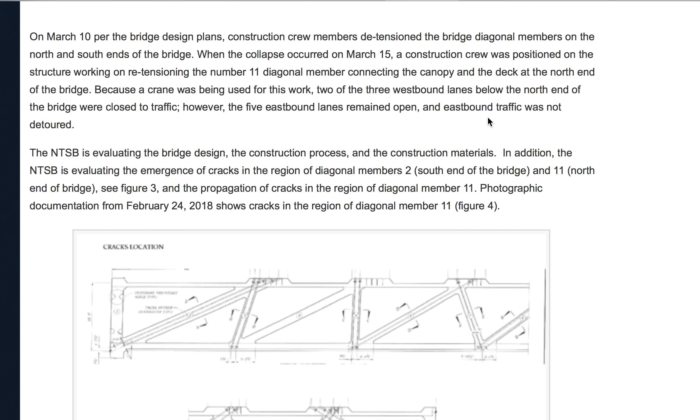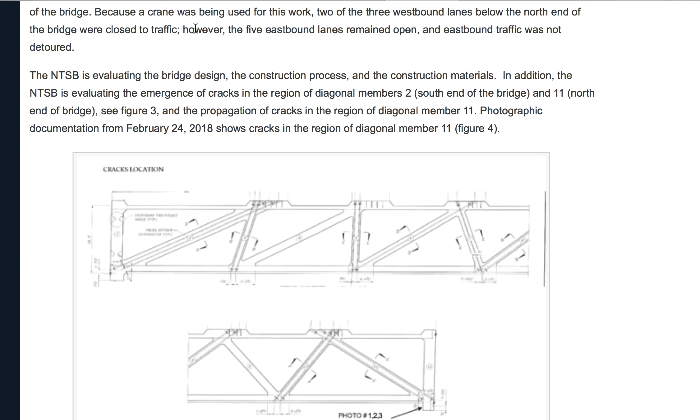Okay, so that's just smoke and mirrors sending you off in the wrong direction. But real quickly, they're saying, for people who might say well the roads were closed, partially closed - well this might be them. Remember, I say things, but I will also defend too. So the NTSB is saying, all right, so it was a partial lane closure, not because of the - this is my summation - not because of the bridge being post-tensioned or worked on. It was because a crane was needed in the roadway. Okay, so that's what that is implying to me.

The NTSB is evaluating the bridge design. So the NTSB, the plane people, is evaluating the bridge design, the construction process, and the construction materials.

Go back to planes. You guys need a bridge. You need to partner off and get yourself some bridge people. We got more bridges that are collapsing and having issues than planes. So clearly we don't need plane experts, which obviously people are more scared of dropping out of a plane, right? Apparently we need some bridge experts. So the NTSB needs to cough up the money, the federal government needs to cough up the money and come up with some bridge collapse experts that you're sitting around ready to dial in. But they can't be FIU, obviously. They can't be anybody with sweat in the game. It's got to be people that actually want to attack and not support. And once they attack, then they need somebody themselves to then support their opposite side and attack their own attack, if you will. All right, it's sort of the stuff I do, right?

In addition, the NTSB is evaluating the emergence of cracks in the region of diagonal members 2, which they didn't point out, south end of the bridge. And the region - that's 1. That's not S, as I know it is 2 regions.

So you don't say region. You're isolating diagonal number 2 by saying region, meaning it's 1 point. You got to put an S to it or call it diagonal number 2, because as I clearly know there are multiple ways. But again, this is playing with words, because region - this is region. In the region of diagonal number 2, guess what? This is region. Oh, this is region. This is region. This is region. Oh, down here, this is region. Emergence of cracks in the region of diagonal member 2.

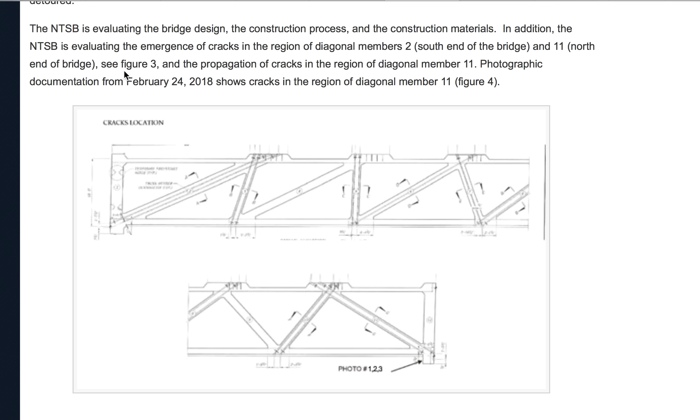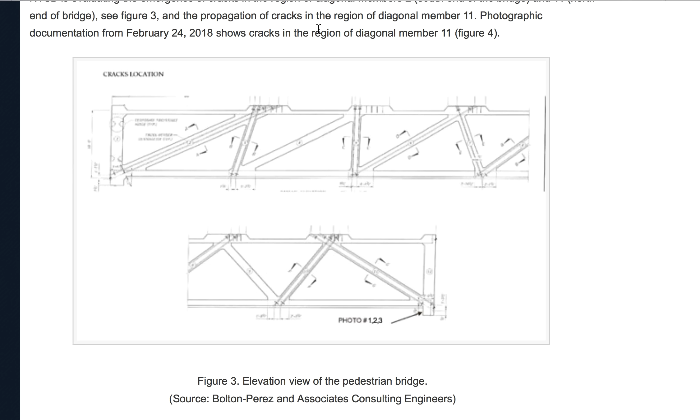Region could be everything from that center of the road down. Region is just so ambiguous. And then it says 'and 11, north end of the bridge.' So 'and 11, north'... come on, that means the entire structure. Just stop playing around, see figure 3. So if you're looking off that comment and it's figure 3, well, there's no region identified here at all besides the communication. This is your smoke and mirrors, saying the wrong direction. They're looking at the base of the bridge, the load-bearing part. It's just ridiculous.

And the propagation of cracks in the region of diagonal member number 11. Propagation, this word is amazing, this could mean so many things, so I'm not even going to troll myself on that. Photographic documentation, they're looking at photographic documentation from February 24th.

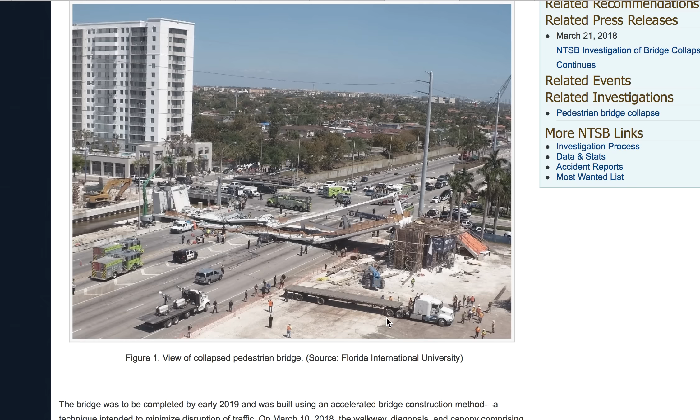Watching, take care. And oh, I'll do the comments down the bottom. Oh, immunity, wow, I'm glad I said that. Immunity, the only way they're going to get to the bottom of this is the Office of Inspector General, which I don't think they have the ability to. They just somehow involve somebody, not the NTSB. Don't get immunity from the NTSB, they have an agenda, waste of time.

We need a prosecuting authority to offer immunity, first come first serve, the one with the most... I hate to say it, because I'm being biased, would Denney Pate be the one you offered immunity to? Yes, if he was to give up his license, since he's the head engineer, he's the one that can tell all what his intent was about this.

Remember, I say things that go against me. I think we just need to learn structurally what went wrong here. If your intention is to just get your pound of flesh, we can't learn from it, mistakes will repeat. If your intent is so this won't repeat, then we can learn from it. So yes, you need to give immunity to Denney Pate with the condition that he'll never do bridge construction again. But you can't give immunity and say 'we want to kill you' for that. He needs to protect himself with prosecution, with people coming after him for the deaths that resulted from this negligence, I think.

That's going to happen, so I don't know. You should not be able to give immunity against that because you want this data. So they should be allowed to sue, but they should not be allowed to use his information for his immunity. So somehow they have to quickly resolve the lawsuits that he's got to pay up. Maybe all the people already determined what they want, how much money, then none of them want to go to court and try to go for the $100 million deal if you want, so it's not going to drag out that way.